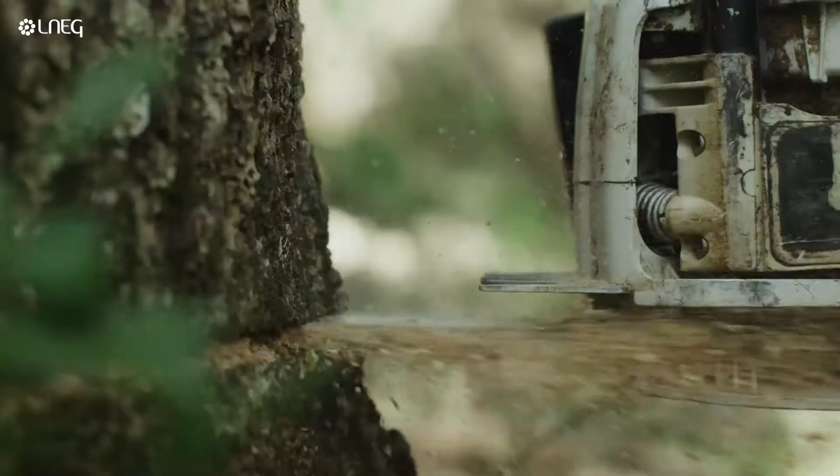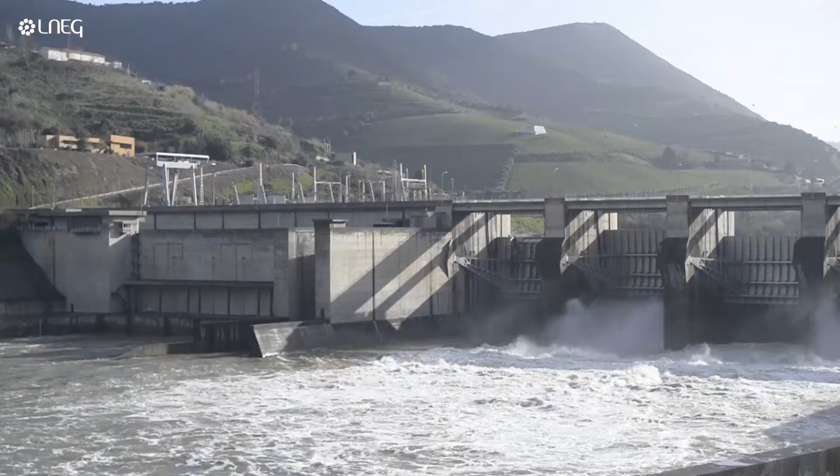Our society faces unprecedented challenges regarding the environment: climate change, pollution, deforestation, population growth, carbon emissions. Energy is one of the main areas that must be tackled in order to reduce the negative impact of human activity. Production from renewable sources, increased efficiency, and carbon neutrality are at the top of the list, but there are still some obstacles to overcome.

Considering the targets of the European Green Deal to be achieved by 2050 - zero pollution, affordable and secure energy, high-quality food, smarter transport - we conclude that the energy sector is a top priority and that hydrogen can play a key role in almost every goal.

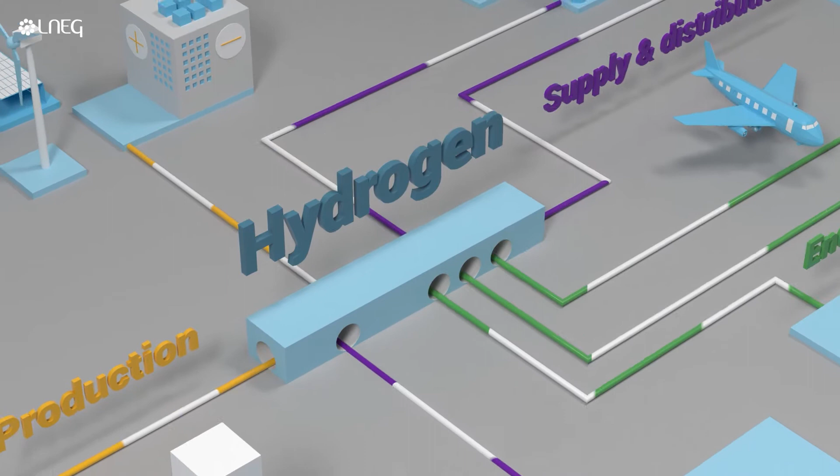Currently, hydrogen is mostly produced by fossil fuels and used mainly in the chemical industry, but that might change within the next few years. It is expected to become a significant sustainable fuel that will contribute to the mitigation of climate change and the decarbonation of the energy system.

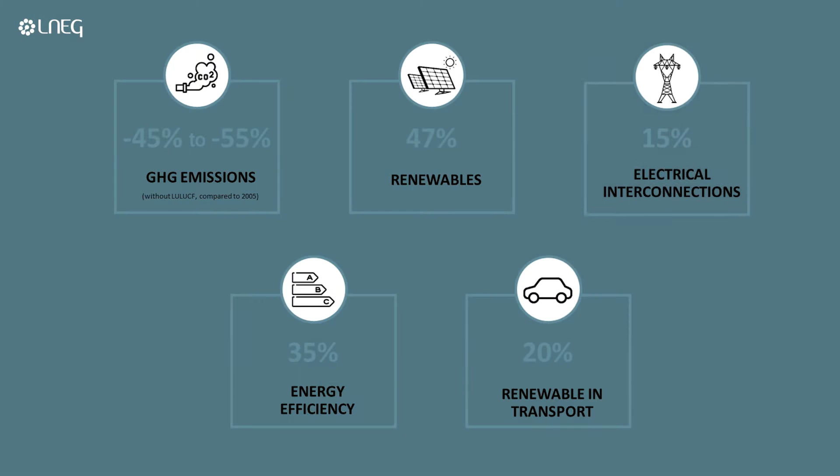In Portugal, the energy and climate targets for the 2030 horizon are very ambitious, and they are presented as opportunities for the economic and industrial development of the country in the energy transition.

The opportunity for hydrogen in the next decade in the framework of investments is based on the definition of the recently approved National Strategy for Hydrogen, that will support large-scale demonstration initiatives and research and innovation, integrating hydrogen in our options of decarbonization. The strategy is understood as facilitating the target compliance and objectives of the Portuguese Integrated National Energy and Climate Plan, the PNEC 2030, acting in the sectors where electrification is too expensive or not possible at all.

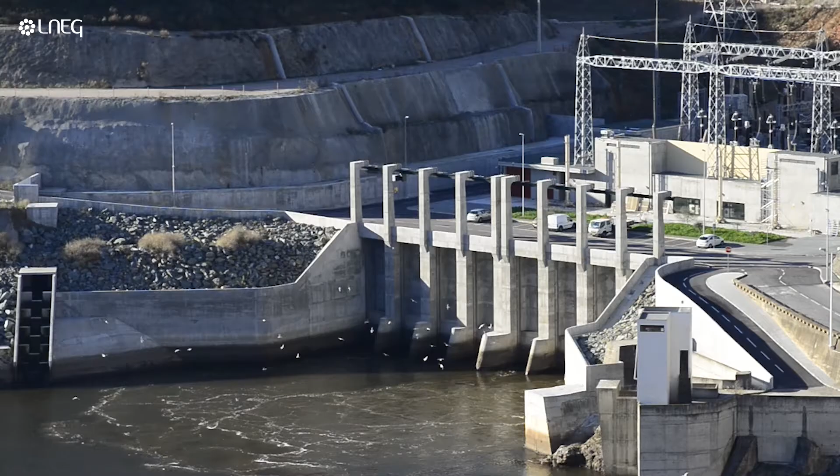Portugal presents very favorable and unique conditions to develop a hydrogen economy, including the existence of a modern natural gas infrastructure, very competitive renewable electricity production prices, and a strategic geographical location that facilitates exports.

The projection of costs to produce green hydrogen using water electrolysis by the Hydrogen Council in 2020 considers average solar irradiation and aeolic conditions of member states in the EU. Portugal is in a privileged situation by exhibiting the lowest costs of production.

Within the hydrogen projects presently in course at the Portuguese National Laboratory of Energy and Geology, LNEG, is the HYLANTIC Project.

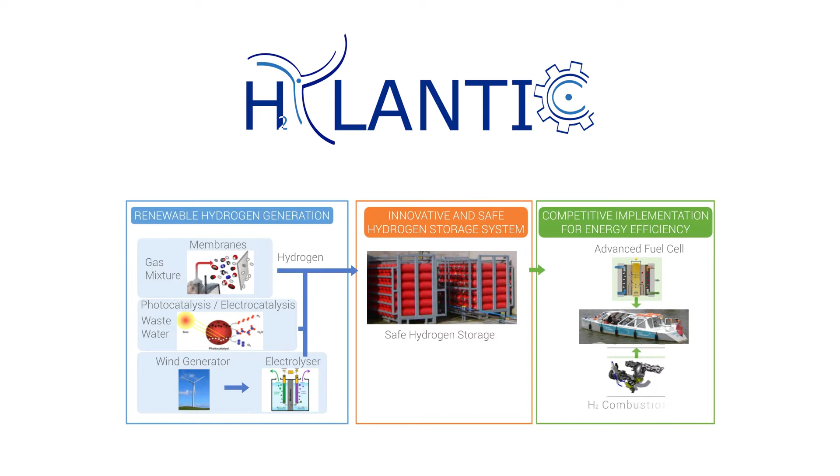With partners located in the Atlantic area, HYLANTIC aims to establish an excellent transnational network to advance the R&D through the implementation of renewable hydrogen generation, safe storage, and efficient low-cost energy systems through innovative fuel cell design and H2 combustion engines. Environmentally friendly outputs will provide energy-efficient solutions to strategic sectors in the Atlantic region and benefit regional industries, generating positive socio-economic impact. HYLANTIC is developing different innovative routes for efficient and renewable hydrogen generation within the Atlantic area.

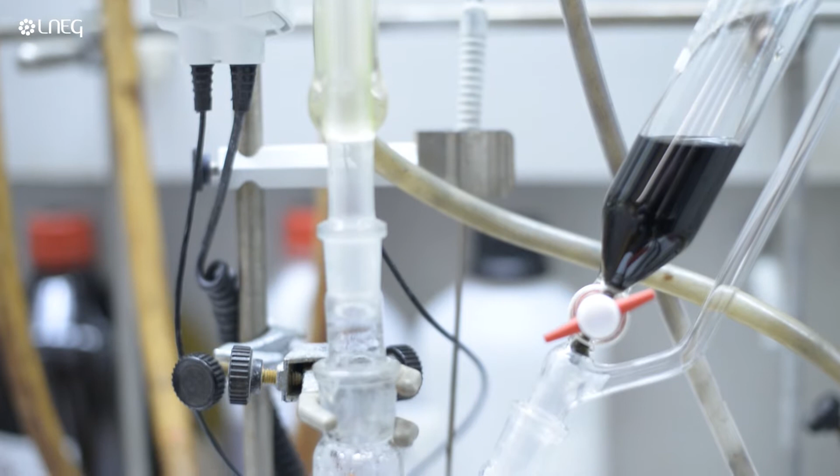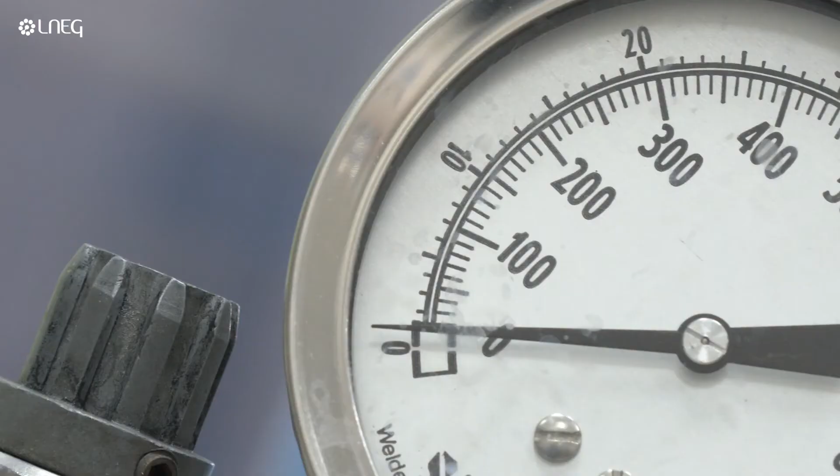LNEG contributes to the analysis of the state-of-the-art, looking at key issues on innovative engineering solutions for hydrogen storage in marine systems and coastal infrastructure, and recommendations to provide higher safety level at facilities of hydrogen generation, storage, delivery and use. LNEG is involved in several working packages in the context of innovative and safe hydrogen storage.

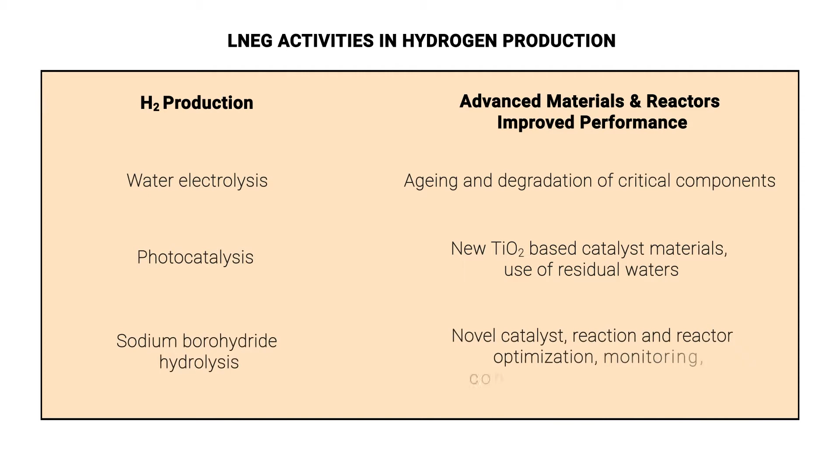We have addressed it not only in the bottlenecks of the technologies, but also the critical issues, because there is a competition with fresh water to be used in these processes, and the power input, which represents a big chunk of the cost of the hydrogen produced, when, for example, it is electricity.

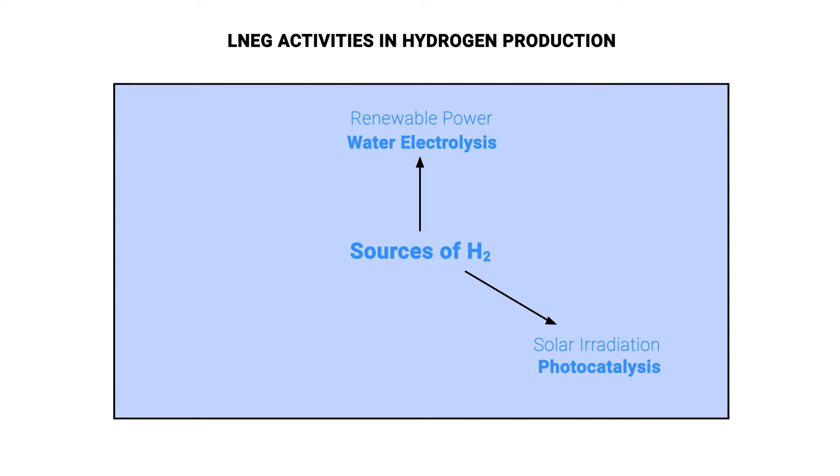So we have hydrogen production powered by renewables using pure water, powered by light using residual waters, and using no power at all because the reaction is spontaneous from a mixture of water and chemicals, where we develop the catalyst and the prototype reactors together with the management systems in order to advance toward applications in the maritime sector.

In another process of hydrogen production, we use residual waters as a feedstock, integrating the hydrogen production with effluent remediation and valorization.

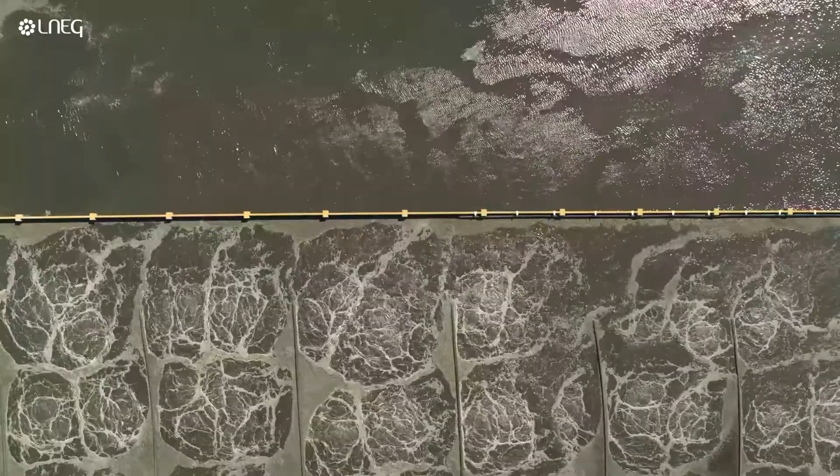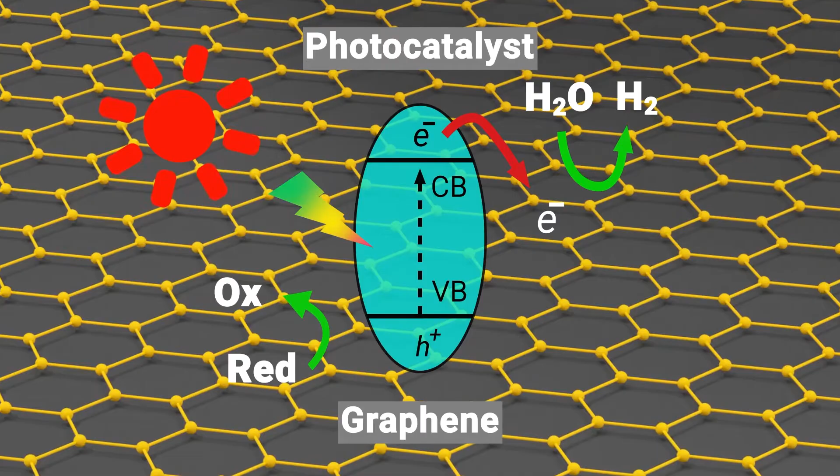In this case, the process of hydrogen production is powered by light. We produce photosensitive catalyst materials, and in this case are ternary new systems that substitute noble critical materials for transition metals, looking at increasing efficiency of these catalysts.

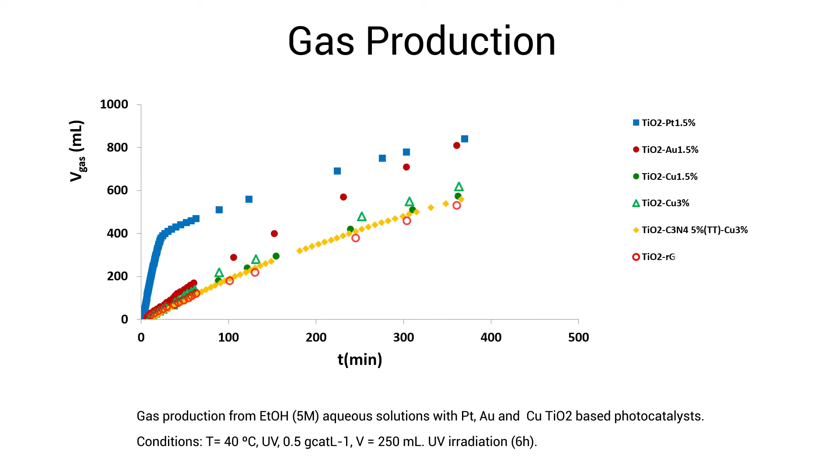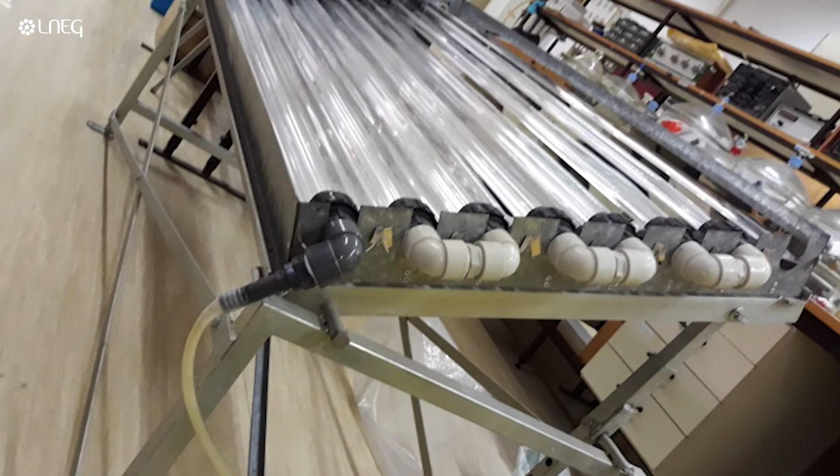We have managed to have very high rates of production of hydrogen and durability of the catalyst, extending also the irradiation times. The objective is also to enhance visible light utilization in order to use outdoor stations that capture visible light directly from the sun as reactors.

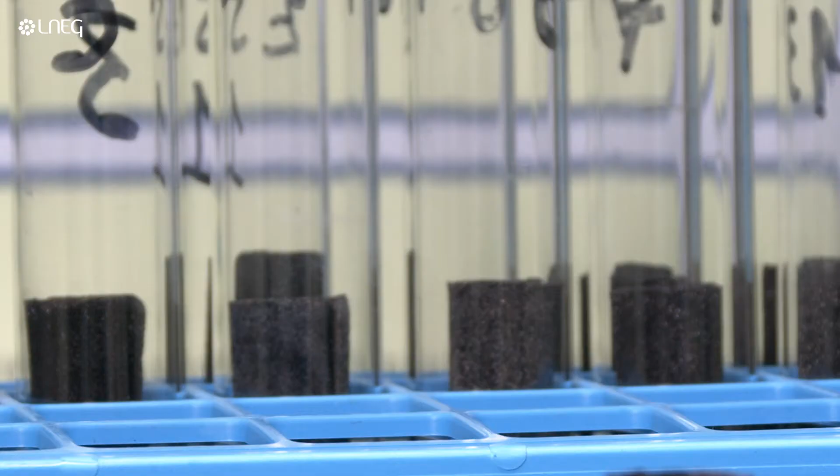LNEG is in charge of developing the catalyst for the hydrogen production by a hydrolysis reaction, a laboratory reactor prototype, a monitoring and control management system.

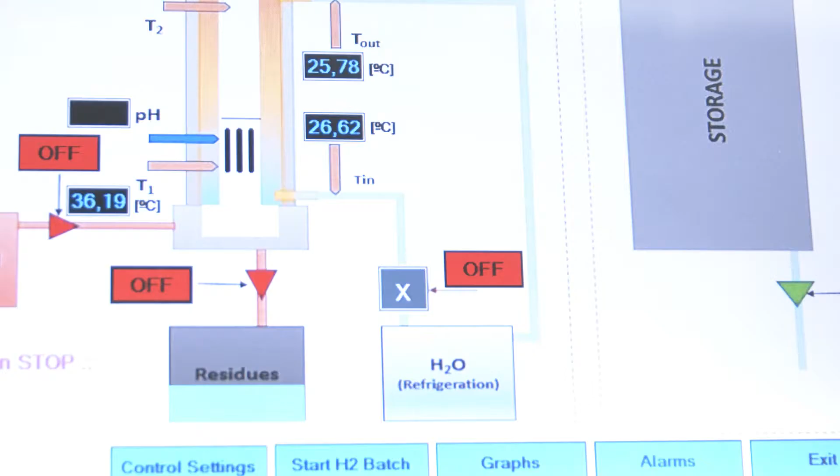Most of the available research data on hydrogen production focuses on the search for catalysts, their characterization and catalytic activity, with experiments generally performed under atmospheric conditions.

We use water to produce hydrogen mixed with chemicals, in this case chemical hydrides, particularly sodium borohydride. And in this process, we use a hydrolysis, which doesn't need any power input as such, since the reaction is spontaneous.

And is exothermic. Sodium borohydride is one of the most studied chemical hydrides, owing to its combined advantage of high hydrogen capacity, good stability in alkaline solutions, easy control of the hydrogen generation rate, friendly operation, and an environmentally benign hydrolysis product, sodium borate.

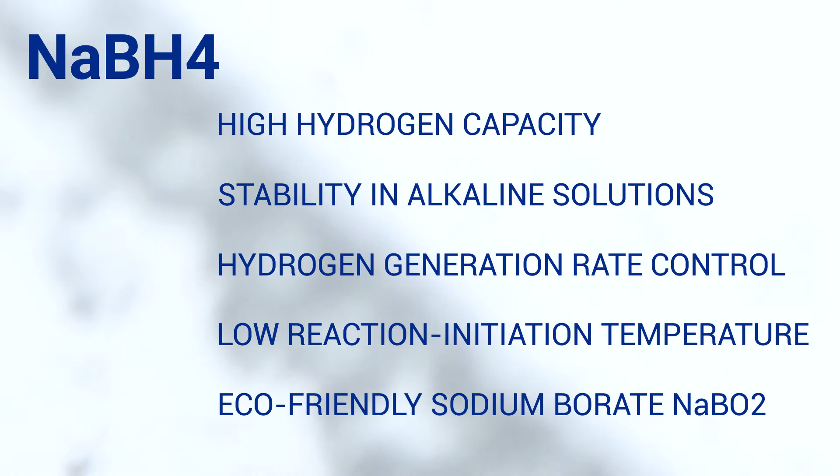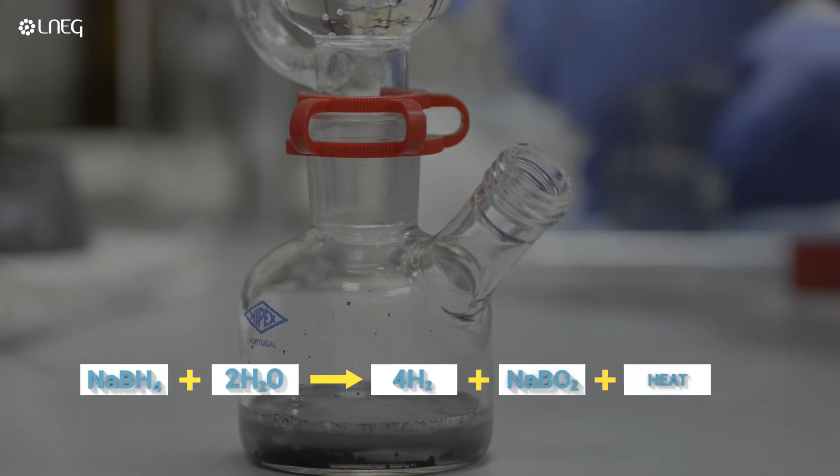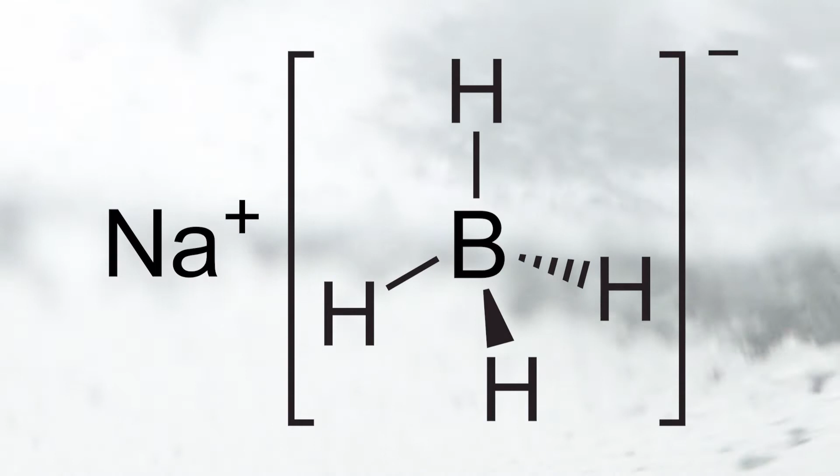Hydrolysis of sodium borohydride can be easily accelerated by the simple addition of a metal catalyst. Half of the hydrogen comes from the water, giving sodium borohydride a relatively high theoretical hydrogen storage capacity of 10.8% in weight. We have used an integrated approach of high efficiency and durable catalysts that have been produced by us.

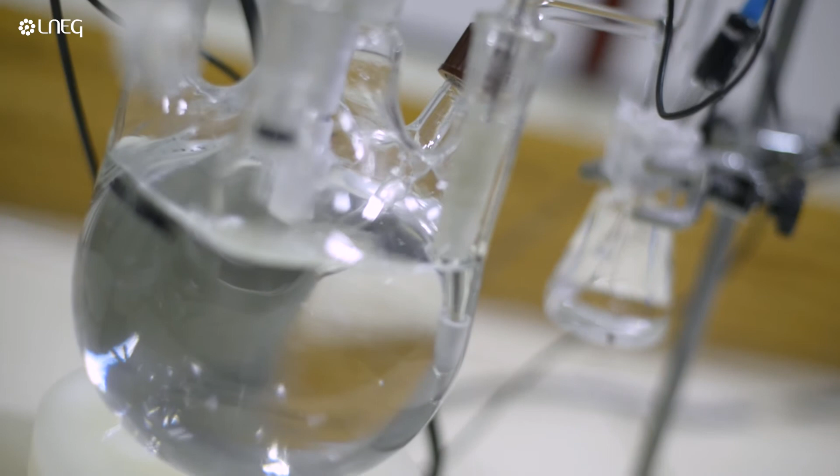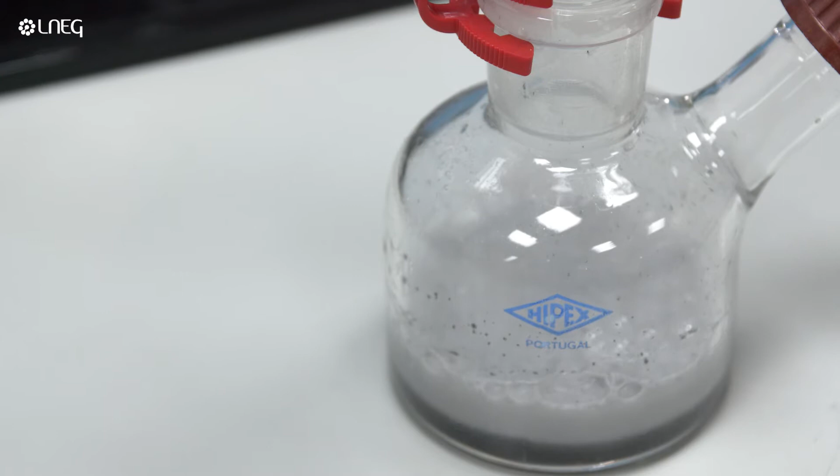We have studied the reaction kinetics and have assessed issues of solubility, of water management, stability, for example the effect of pressure also on the reaction rate, and other issues which are important, like starting the reaction at low temperatures, near freezing temperatures. But hydrogen generation by hydrolysis of sodium borohydride is not without problems.

Heterogeneous catalysts can be added to reduce the activation energy and accelerate the generation of hydrogen. In the past 15 years, different catalyst systems have been reported for sodium borohydride hydrolysis, most of them powder-based and containing ruthenium, nickel, and cobalt, some even platinum.

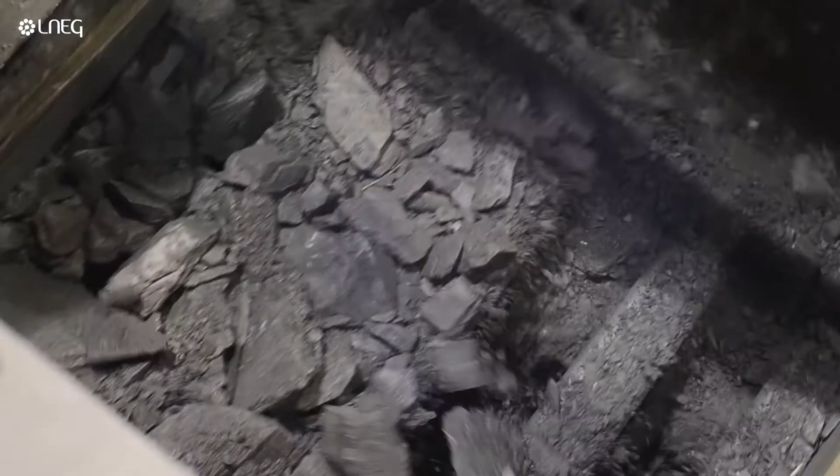However, noble metals are scarce and expensive, so the use of catalyst systems based on cheaper transition metals is highly desirable. Specifically, cobalt and nickel have been the most employed to date due to their low cost and abundance compared to noble metals.

While searching for an efficient catalyst for the hydrolysis of sodium borohydride, LNEG opted for a supported catalyst on a metal foam rather than a powder-based one. The choice is due to high porosity, large specific surface area, satisfactory electrical and thermal conductivity, and mechanical stability.

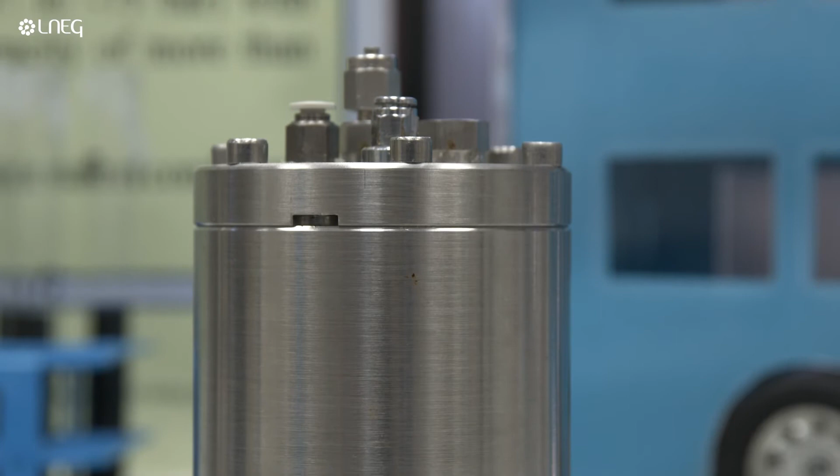We have also been involved in reactor design, correlating the performance of very small reactors that we started from, with very small volumes of 5 milliliters, to large prototype reactors. This is a complex task and also integrates heat transfer.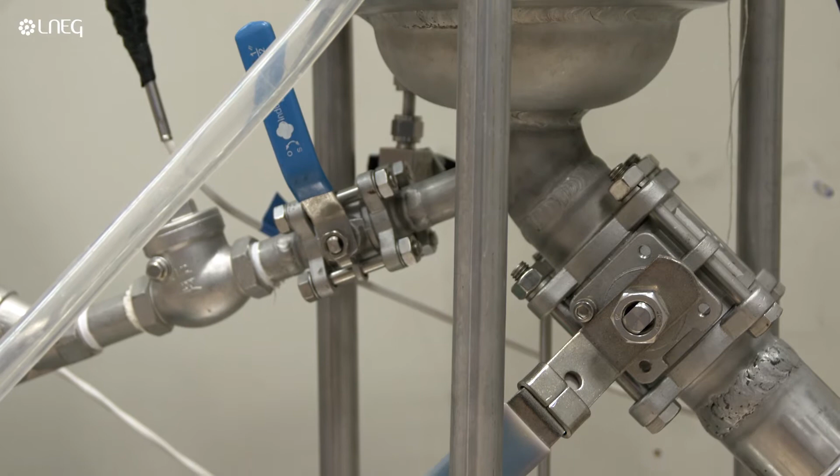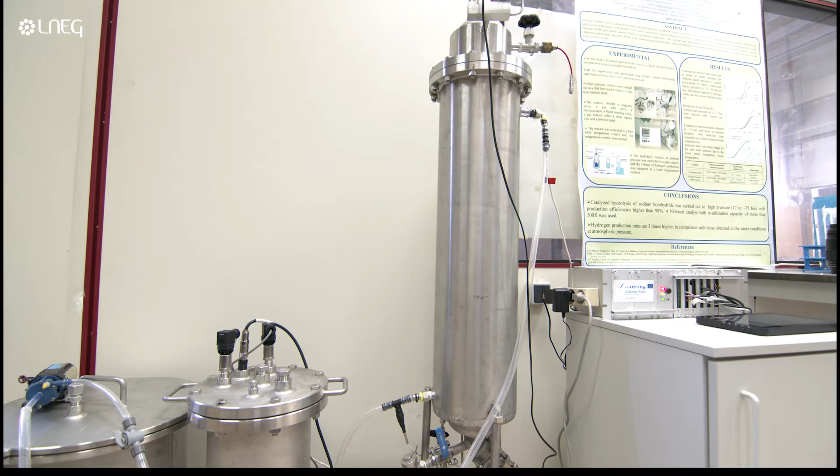The prototype laboratory batch sodium borohydride reactor, made of stainless steel, has an internal multi-tubular structure that allows efficient heat transfer and can work safely up to 60 bar. The total of its internal reaction and storage volume is 21 liters.

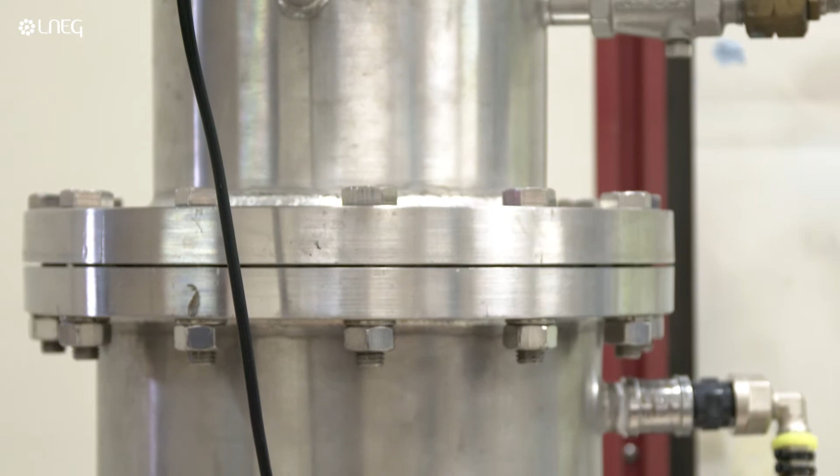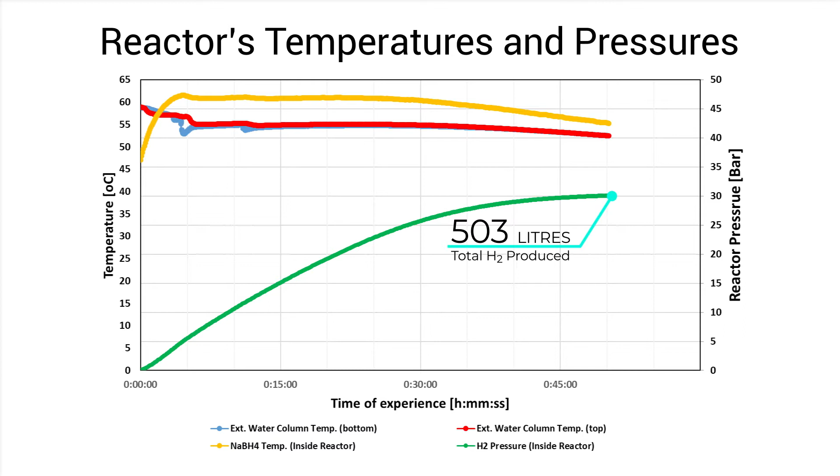After 50 minutes reaction time, the total hydrogen produced was approximately 503 liters, reaching an internal pressure of 30 bar. The maximum production rate achieved was about 15 liters per minute.

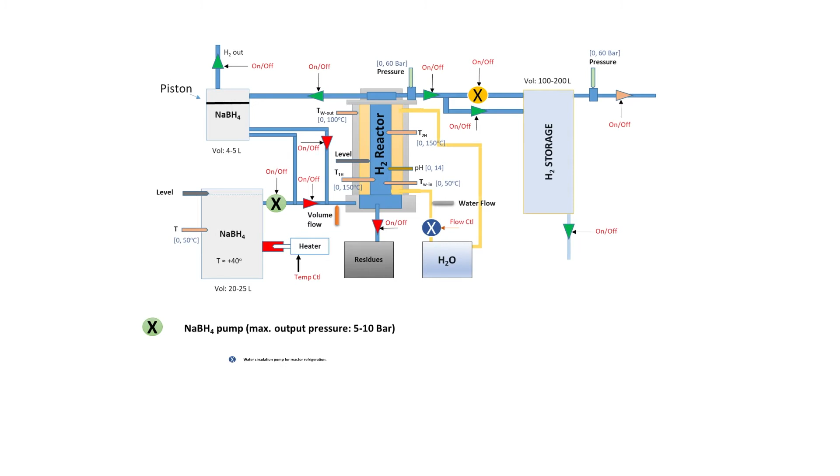As stated, the reaction is exothermic, and the heat produced is extracted using water as a thermal fluid that runs in a jacket between tubes and the reactor shell in order to control the temperature-dependent reaction rate.

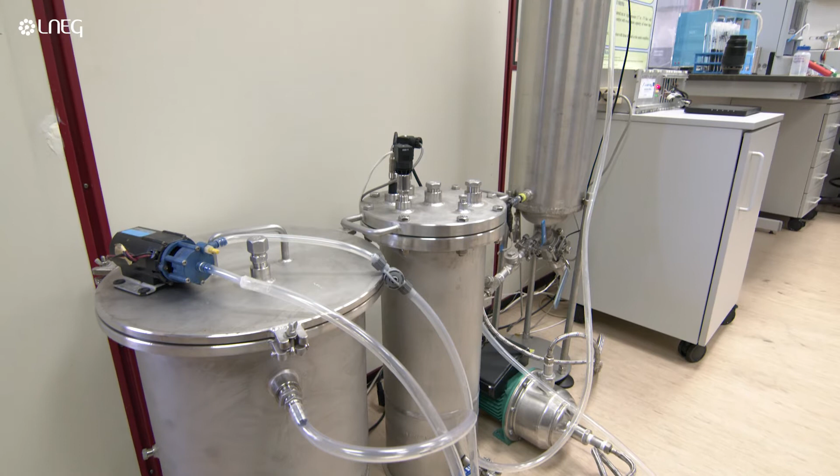The batch reactor system also includes a storage vessel for the produced hydrogen and external containers for the sodium borohydride solution and for the reaction's final residues that will be extracted from the reactor.

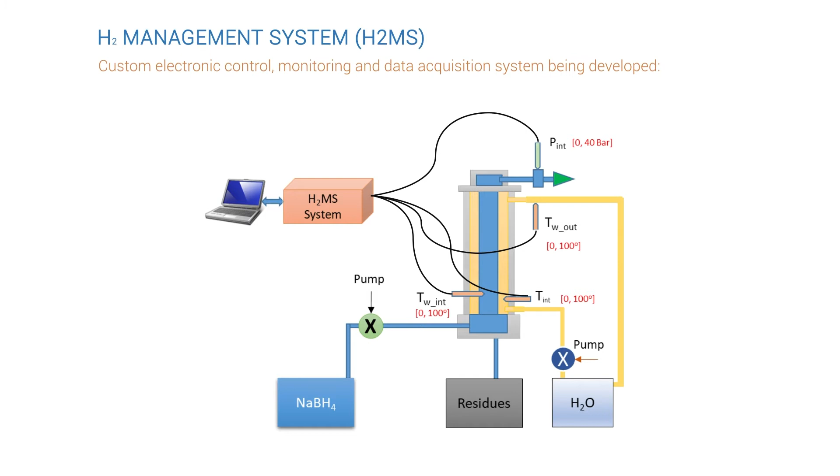In order to assure safe and optimal reaction conditions, the system integrates a custom-specific electronic monitoring and controlling system, allowing for the real-time control of several actuators and data acquisition during the hydrogen generation and storage process.

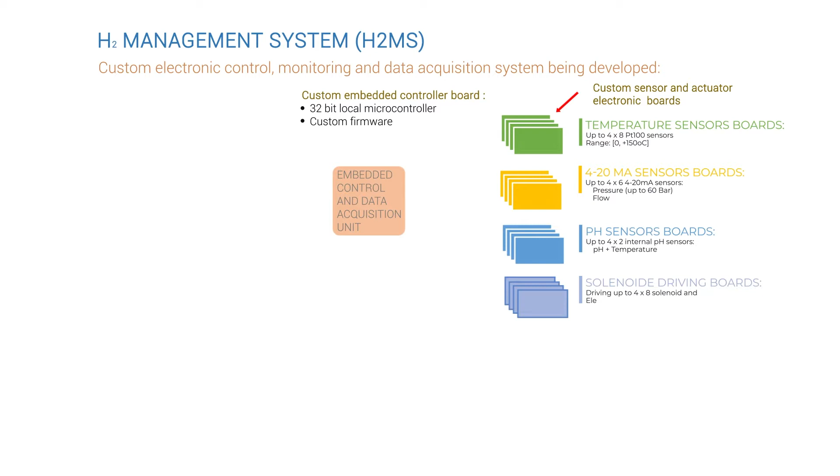The objective is to achieve an automatic on-demand control of the batch reactor to provide a quasi-continuous production and storage of hydrogen to fulfill the energy requirements intended to feed a fuel cell, according to the application.

This electronic monitoring and controlling system, Hydrogen Management System (H2MS), was designed from scratch and has a modular hardware architecture, allowing a flexible and expandable hardware configuration.

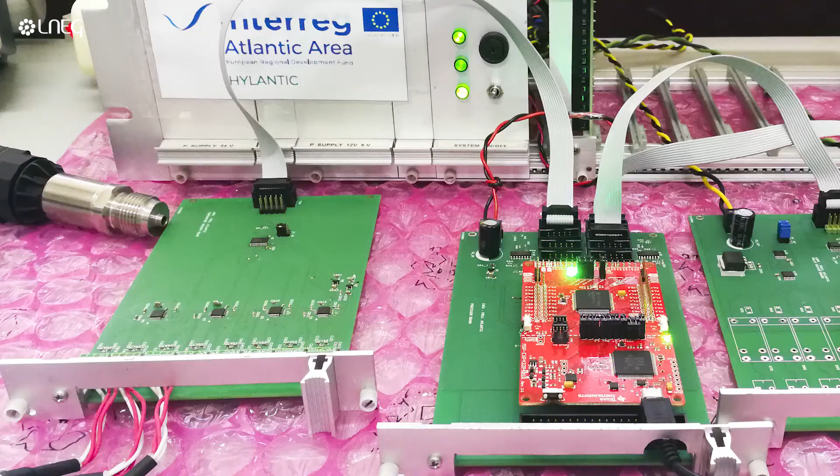The H2MS system's customized hardware and firmware can be optimized and redesigned for different types of reactors and applications, allowing a final lower cost when compared to other off-the-shelf acquisition and control systems.

The system's architecture allows the data acquisition from several types of sensors related to the most significant process variables like temperature, pressure, pH, hydrogen flow rate, etc.

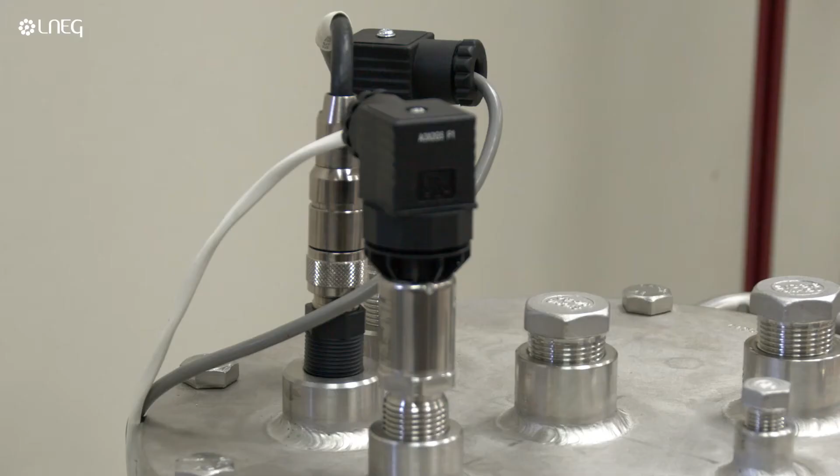Due to the global reactor structure, several electrovalves and switching actuators are fundamental for the automatic or quasi-continuous operation of the system, so this management system can also drive different types of actuators.

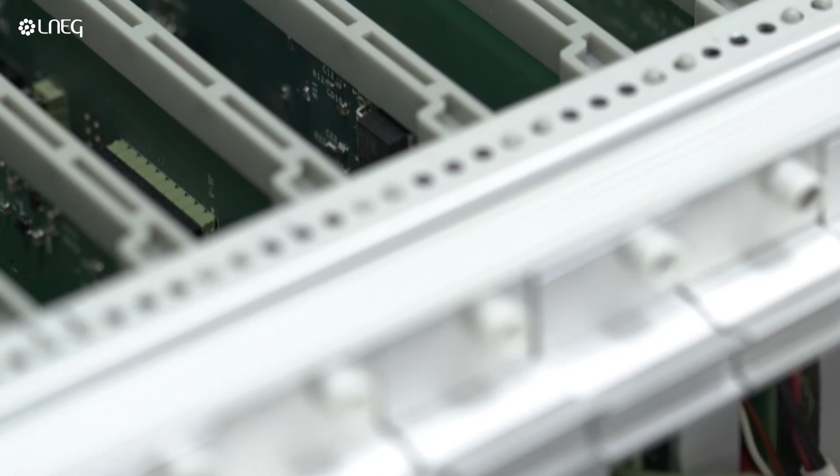The design of the H2MS first prototype was completed with the assembled system circuit boards interconnected using a standard rack mounting panel that also includes the power supply modules.

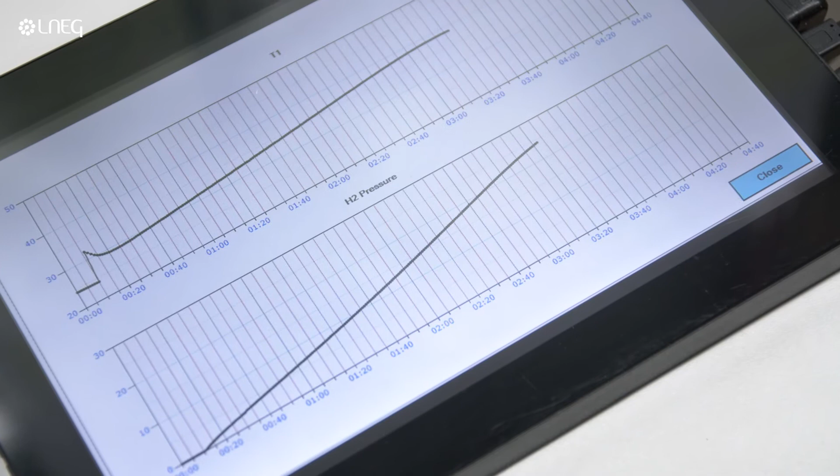The H2MS system includes a local low-cost single-board microcomputer running Windows 10 environment using a touch-sensitive monitor for data display and user interaction. The high-level software application for reactors control and user interaction is under development, giving the possibility of real-time acquired data reactor status to be displayed in a synoptic dashboard.

In the future, it will also be possible to access remotely the H2MS unit for data collection and control interaction.

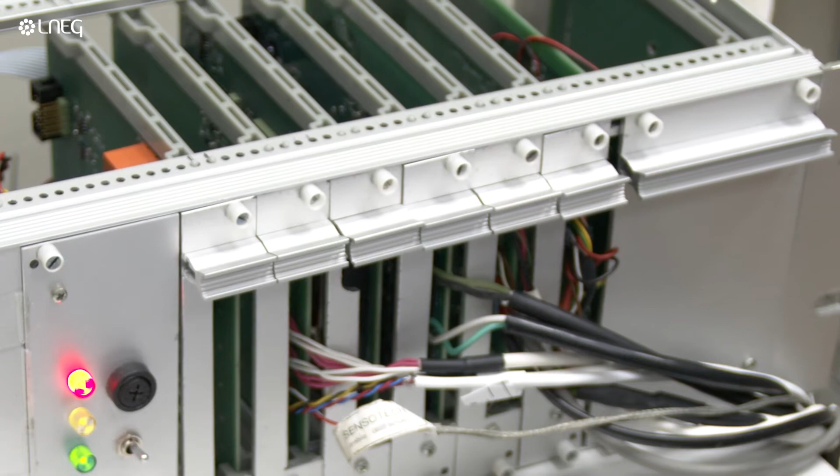The integration of the H2MS system with the global sodium borohydride hydrogen reactor allows a more elaborate model characterization and operational optimization of the global batch chemical process. This is a key aspect to the development of new control models for optimized reactors' on-demand hydrogen production.

The supported catalyst, synthesized, characterized and tested at LNEG, was shared with FEUP, the Faculty of Engineering of the University of Porto, and with industrial partner A Silva Matos Company for further independent testing.

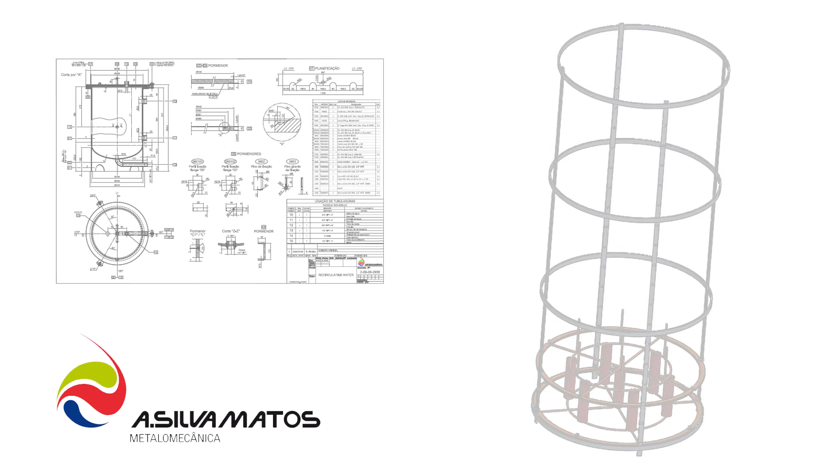Partner A Silva Matos has built an industrial reactor integrated in a system, with additional storage, to be tested using LNEG's produced catalyst. It was a very big challenge because the first reactor was built for 1 liter capacity, so the scale-up was very important.

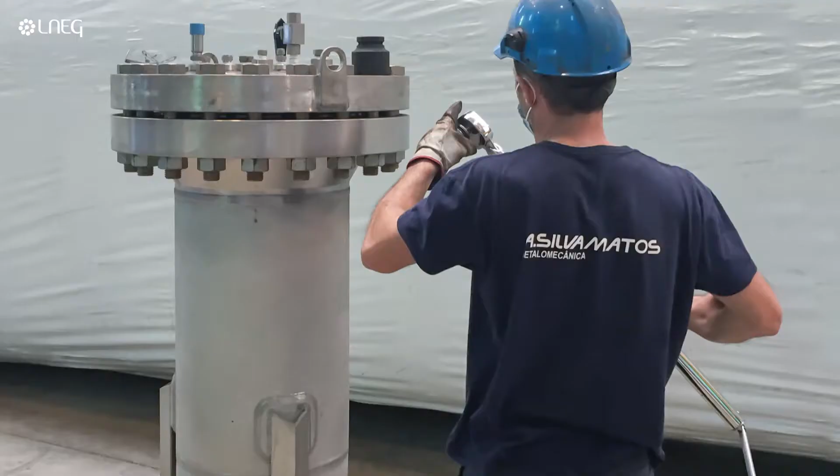The aim of the project was to build a reactor. It has 120 liters capacity with a design pressure of 80 bar and the temperature design of 100 degrees Celsius.

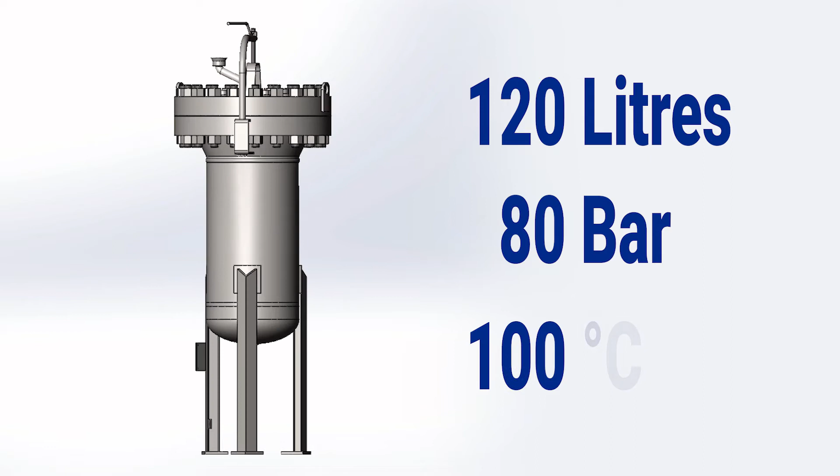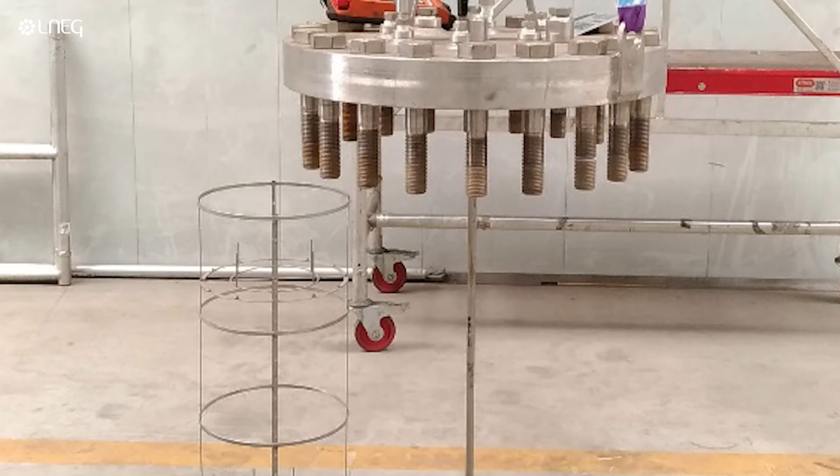It was very important to use the catalyst from LNEG and the sodium borohydride, to improve immensely the potential of the technology. I'm very happy with the results of this project. Now it's possible to use this technology in maritime or distant places to produce energy whenever any other solution is not possible.

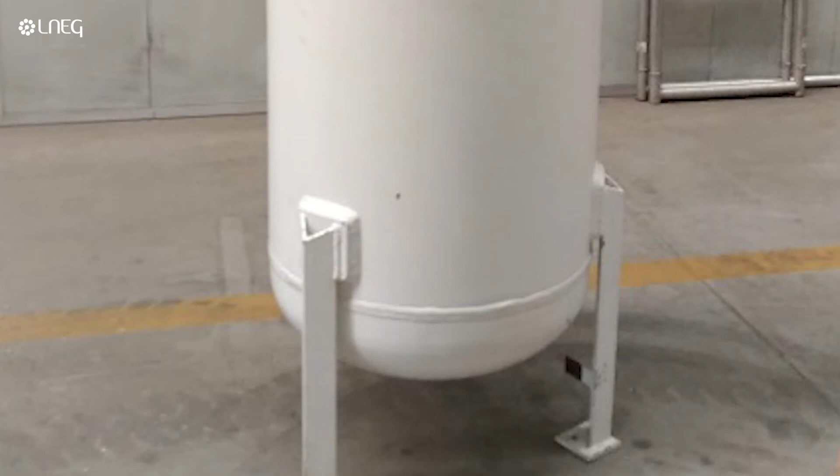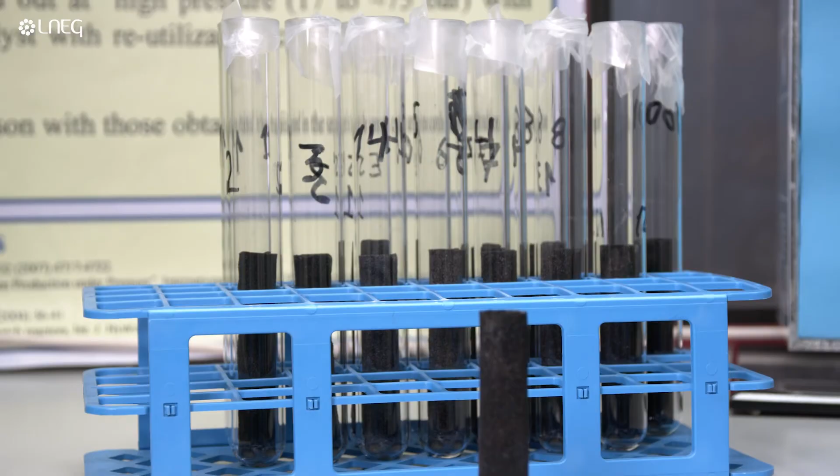This technology can be promising for the maritime industry, although applications and possibilities for onboard applications are still uncommon, presenting the use of sodium borohydride as an energy carrier with many potential advantages, such as a harmless, emissions-free, safe, and recyclable fuel.

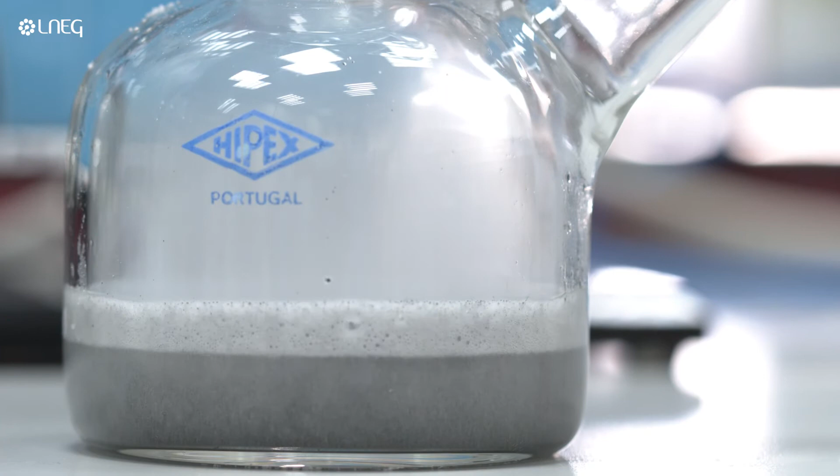From the point of cost reduction in synthesis and post-usage of sodium borohydride, its regeneration from the byproduct of hydrolysis, sodium borate, is in great need for the recycling of this hydrogen supply system. The HYLANTIC Project is approaching this issue with the collaboration of the University of Porto.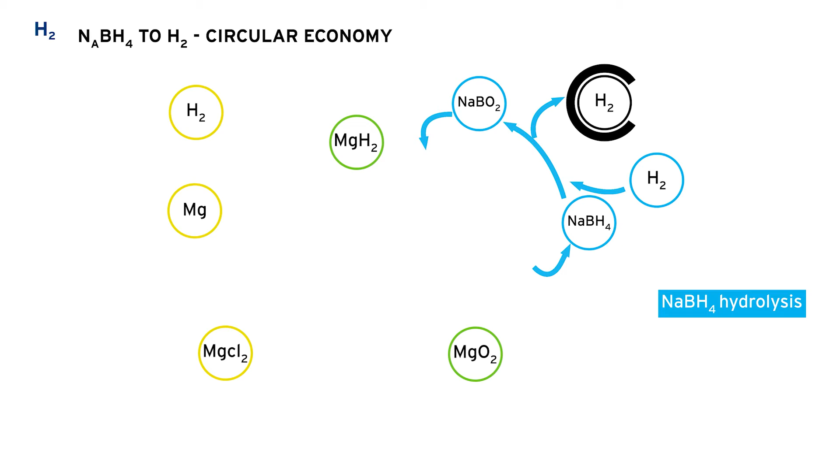The concept relies on the production of hydrogen on demand, in situ, from a chemical reaction. We produce hydrogen using the hydrolysis of sodium borohydride. One of the main challenges of this concept is to be able to regenerate the sodium borohydride from the reaction products.

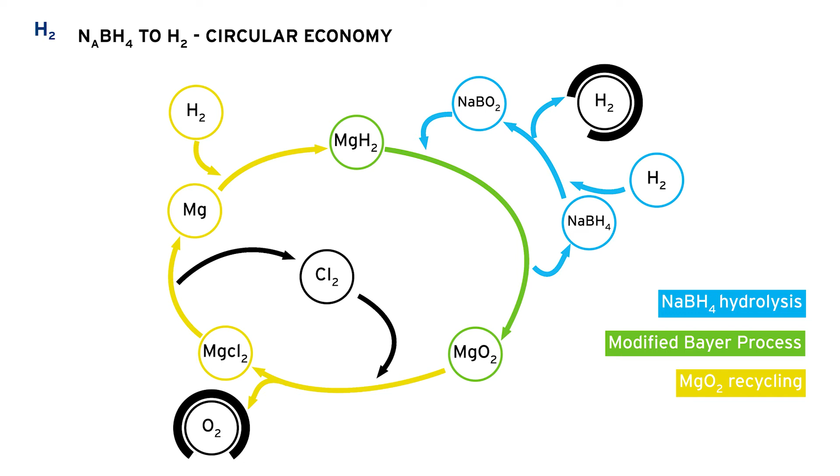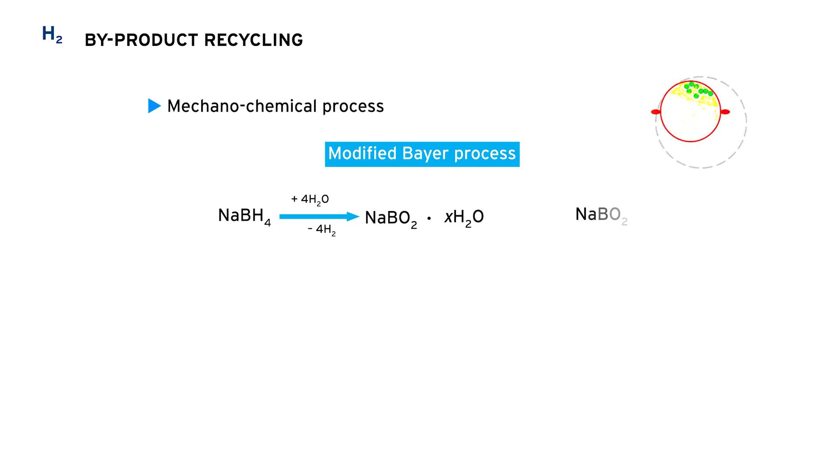At University of Porto, we discovered that using optimal concentrations of some specific additives, we're able to have a profound change in the structure of the borate. We obtain tincalconite, which is a dehydrated form of borax, which is already ready for the inverse process, the regeneration process. So these groundbreaking results will bring down tremendously the costs of the regeneration process.

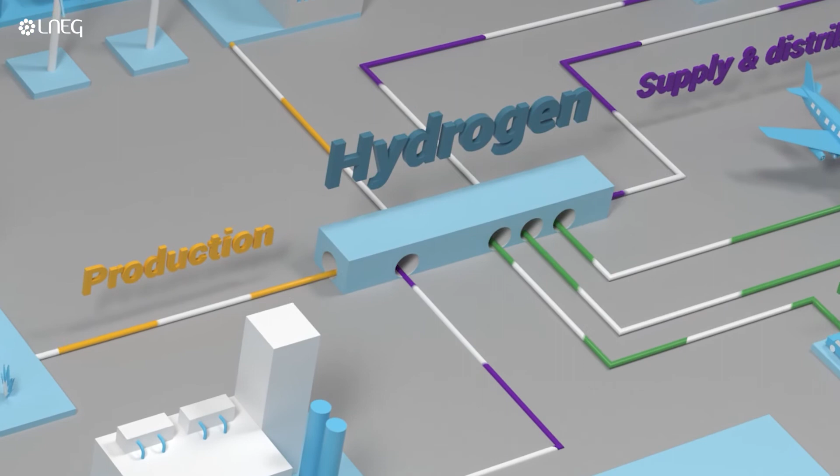I consider that strengthening the research and development base in Portugal is a priority in the next decade, to support demonstration at large scale and also emerging hydrogen technologies in the framework of the energy transition and our decarbonizing options and targets for the different sectors of the economy.

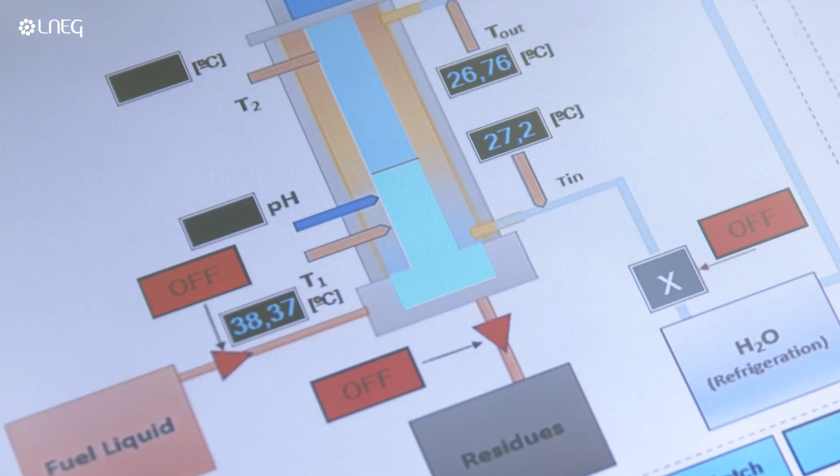The concepts of the sodium borohydride system have a high potential for the maritime industry, for which this technology offers some advantages. Most important is the fact that vessels are surrounded by water, which can be used for the hydrolysis of sodium borohydride. At the current state of technology, much research still needs to be done to prove the concepts and make sure the systems can be implemented safely on this scale.

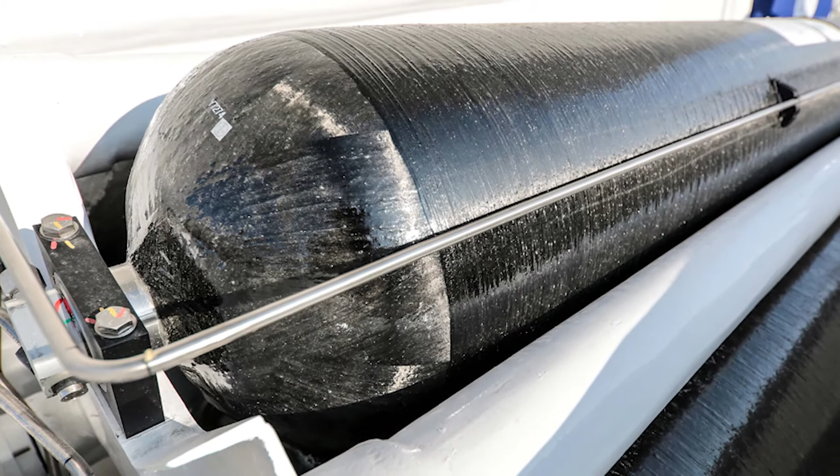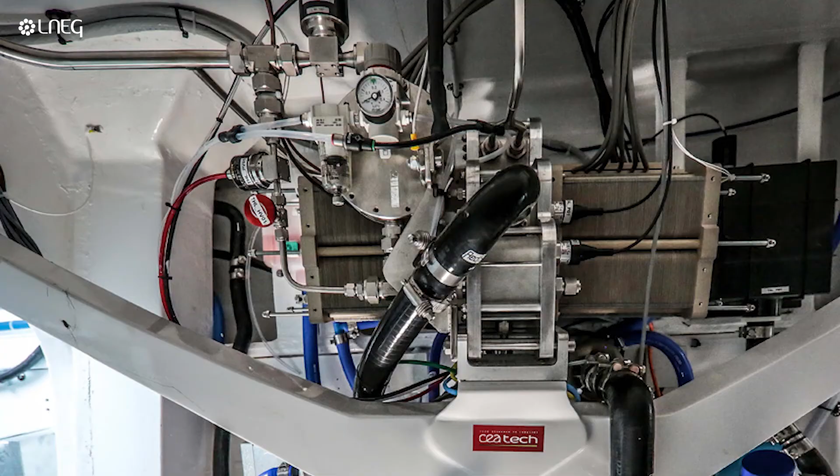The use of hydrogen as a fuel in boats has been demonstrated by the Energy Observer, launched in 2017 and considered a floating laboratory. The ship tests the efficiency of a full production value chain that relies on the coupling of renewable energies producing green hydrogen from seawater electrolysis and converting the hydrogen into energy in a fuel cell.

A 11-metre hydrogen-powered ferry was built in Bristol, UK in 2011. It carries 12 passengers and 2 crew members and is operated by Auriga Energy, one of the HYLANTIC partners.

We've made the UK's first hydrogen-powered, fuel cell-powered ferry, with our fuel cells on board. What the hydrogen provides is a zero-emissions solution to all of our energy needs, particularly where we're replacing the internal combustion engine. They have integrated 4 air-cooled hydrogen PEM fuel cells that provide up to 12 kilowatts of steady-state continuous power at 48 volts.

The HYLANTIC project brings together all of the different angles of the hydrogen economy, and I think we have achieved some great things so far. The hydride systems that are being developed in Portugal by the University of Porto and the LNEG will solve a huge problem within the use of hydrogen in transport in particular.

Sustainability targets for the transport sector are not limited to road transport. Shipping is an industry which is responsible for 2 to 3% of all CO2 and greenhouse gas emissions worldwide, according to data from the International Maritime Organization.

Their strategy envisages a radical reduction of CO2 emissions of international shipping, 40% by 2030, and pursuing efforts towards 70% by 2050, compared to values of 2008. In achieving these targets, it is thought that hydrogen and hydrogen-based fuels have great potential to meet important operational requirements such as range and refueling time, as do conventional fuels.

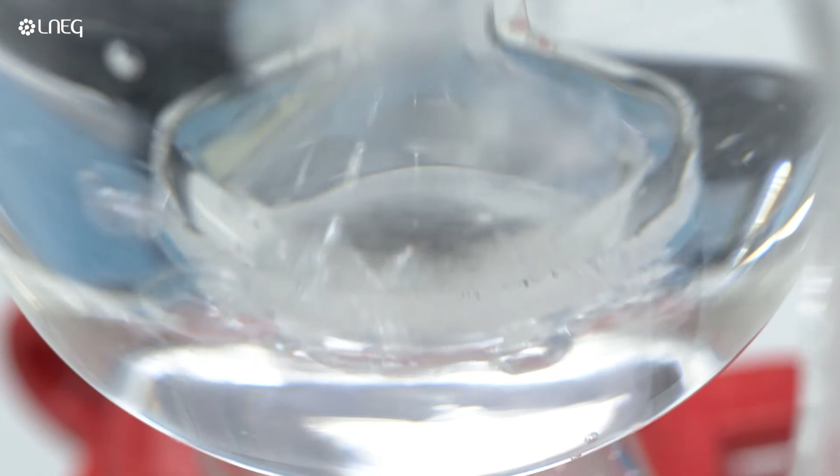Hydrogen is called to contribute not only to limiting the carbon emissions, which obviously are related to climate change and to air quality issues, but also in the security of supply. The hydrogen storage capability and the association with the realization of the full potential of renewable energies will also contribute to the ambitious sustainability targets in the transport sector, and this includes shipping.

As the private sector starts to test technologies and even roll out new products, public awareness of hydrogen-related energy solutions is rising. The HYLANTIC Project has the ambition to actively contribute for a wider acceptance of hydrogen as a fuel, engaging in an intensive dissemination program that maximizes the impact of the obtained results. Alongside governments and research institutions, it seems that a truly global hydrogen ecosystem might become a reality.